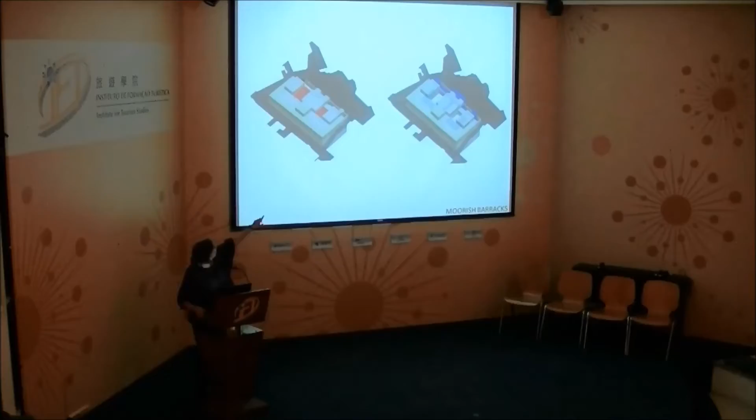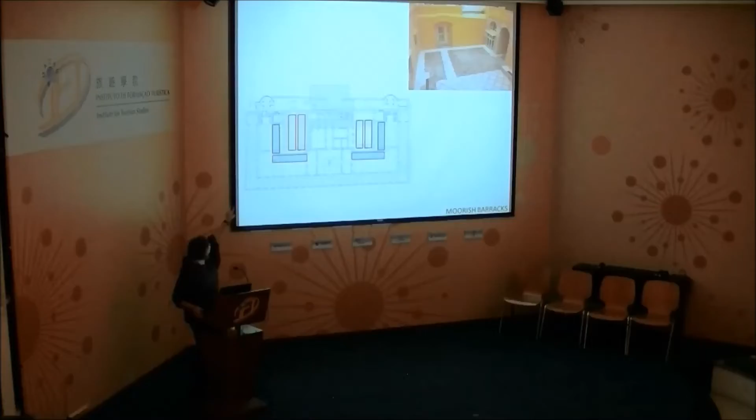So our strategy has been to empty the patio and fit two L-shaped buildings inside the main hall, to accommodate all the area that was requested. You can see here a simple scheme of how we fitted the patio area into these L-shaped areas, which are in 2 floors. In the end we managed to empty the patio completely, renovating it as a public space of the building.

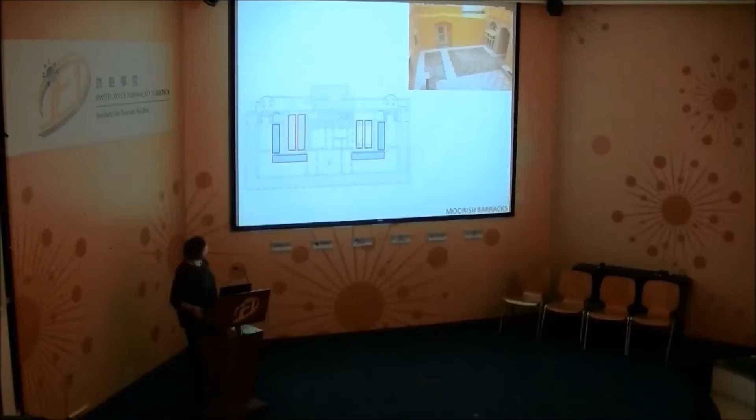Again, this is the interior. We use the same technique we've seen before to design a very different structure. It is a steel and glass structure that in fact doesn't actually touch the original building structure, it's just somehow an insertion.

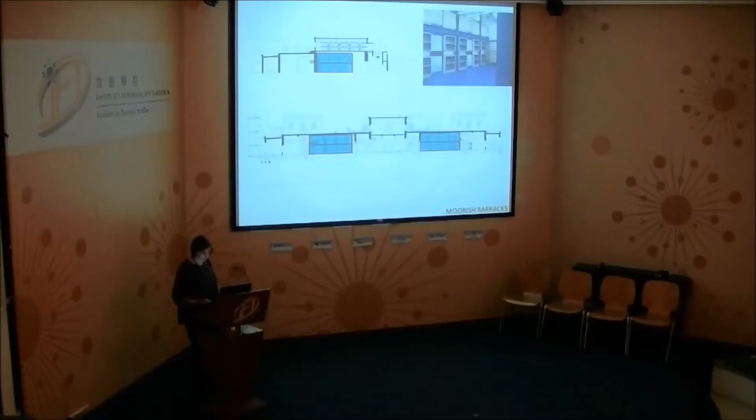So we managed to create several spaces. You can see the public space, which is the space that visitors interested in the UNESCO monuments are able to visit. Then you see in light blue the circulation of the building, and in green the open spaces.

In the end we managed to empty the two original patios, and by design create this vertical axis that connects the main hall to the back of the building, which was not existing before. This connection didn't exist, and we connected the building to the parking area to create an easier entrance for the staff.

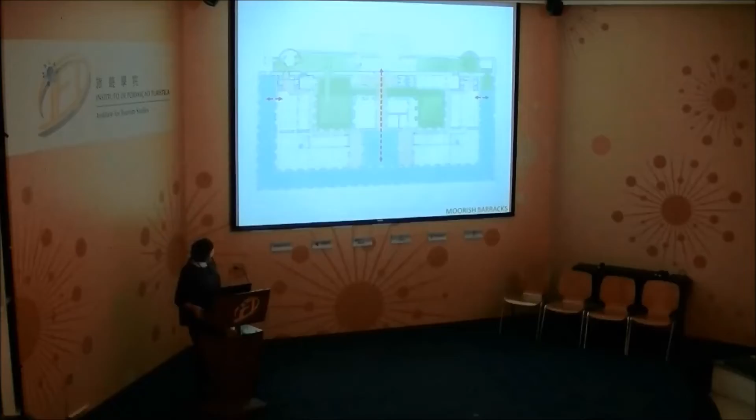So this is the building as it was when we finished construction. The second example is a small library that we did for the Macau Portuguese School. It is situated in the second patio of the school.

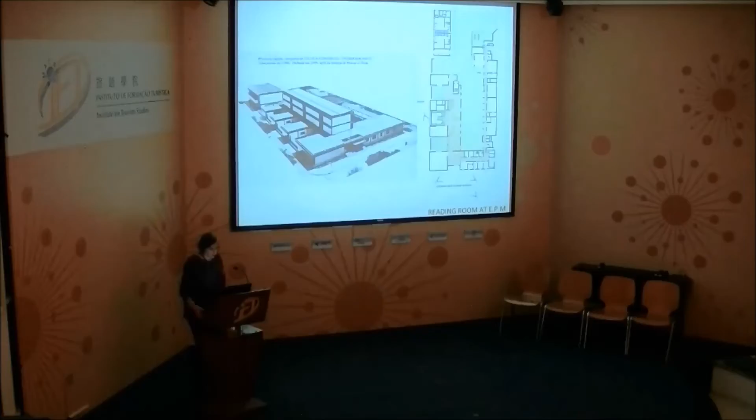The strategy for this library was that it wouldn't be seen from the street. The right-hand side picture is a picture from the street, and the only thing visible is the black beam, which is the roof of the library. So again, we are talking about insertion and how to insert a new program into a historical existing building.

And again, all done by the goodwill of the architect, without policies, without a memorandum or any kind of investigation about the building, its history, and what was important and what should be kept in place. So our strategy was to design a space that wouldn't touch the actual building wall.

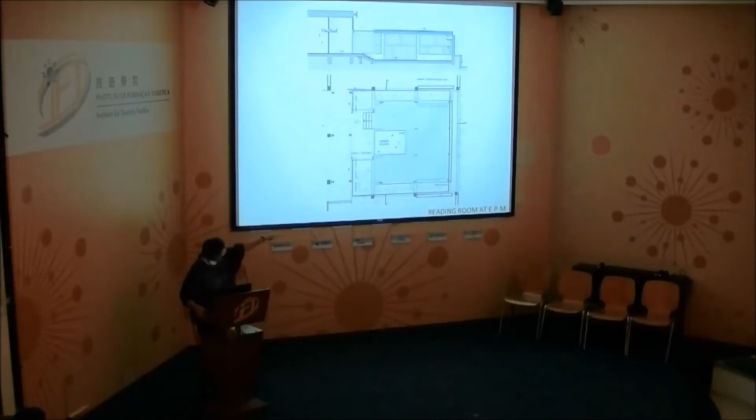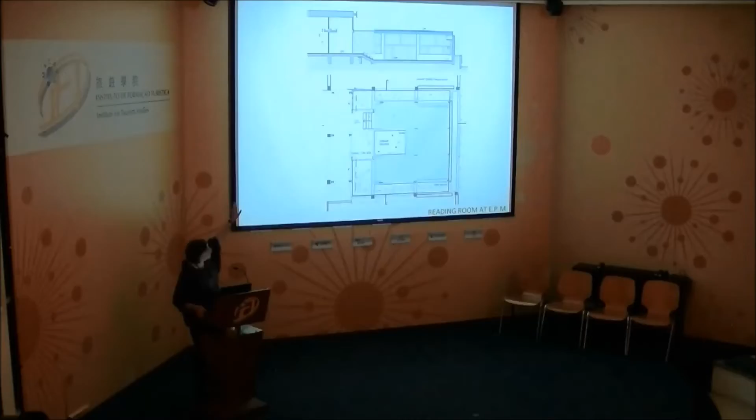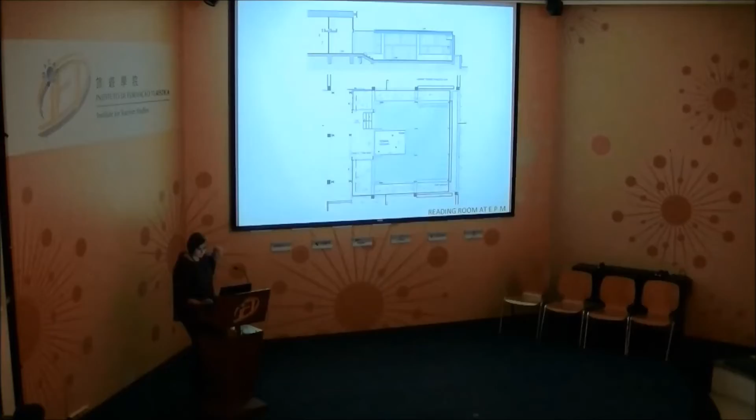So we created two small patios at each side of the roof slab, with the patio in the middle. As you can see in the section above, we just went down 4 steps in order to achieve the exact level of the exterior wall, and have enough headroom inside for a proportionate space. By doing that, our black beam sets itself exactly at the height of the window of the surrounding building.

We then designed a skylight at the entrance of the reading room in order to make this separation effective. In the end, what we managed to do is not erase the patio that was there, keep all the vegetation still in place, and have a usable area within nature.

So these are my contributions to today's conference. I wish we could have a discussion about strategies and policies for everything else that doesn't fall under heritage conservation. Thank you.